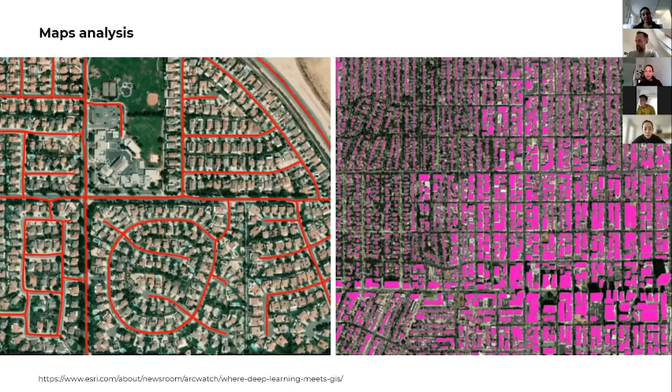The first one is classification. For example, we can use it for map analysis, to classify where the roads are, where the buildings are, to use this information further for our research. It's really useful when we get satellite photos to recognize all these objects without doing it manually.

Another way is to find some features. For example, we can use Google Street View to walk on the streets and recognize specific features of buildings and connect them with, for example, the construction date. Here is the map with the age of the building. I'm not really sure it's made with neural networks, because I think we can get some information like from GIS.

But we can also add this information, for example, like these maps of green canopy in the cities. This project is about comparing some cities because we have these maps with the green canopies pointed on the map.

It was made using Google Street View, so we can walk there to recognize how much greenery we have. It's really important that we can make it from human perception, not from the map looking down, but from walking. Because when we talk about comfort in the city, it's important to think about the people living there and analyze the city from their perspective.

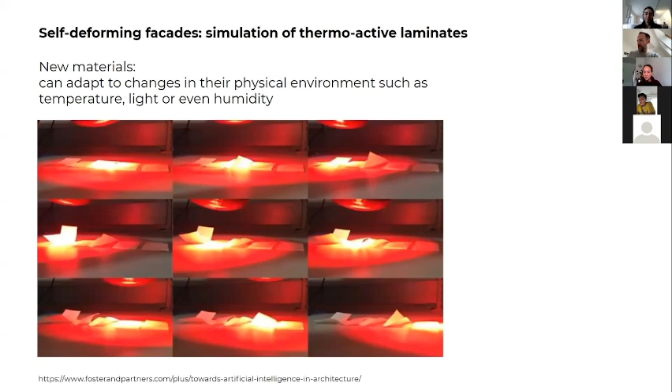Another way to use neural nets is prediction. For example, now we have new materials that are thermoactive and can change their form, but it's really difficult to predict the behavior of these materials. That's why we can train our neural network to make this prediction.

For the input, we need some examples, like the experiments. So we can put different patterns and watch the results, and then the neural network learns to predict. Next time we can just give it the result we want to achieve, and it will tell us what cutout pattern we need to get that form. For example, for difficult facades, we can use it to get the form we want.

And the second field, generation — here we can see the process of training the neural network. The first thing it produces doesn't really look like a plan, but then it's possible to teach it to provide us with good plans for our buildings.

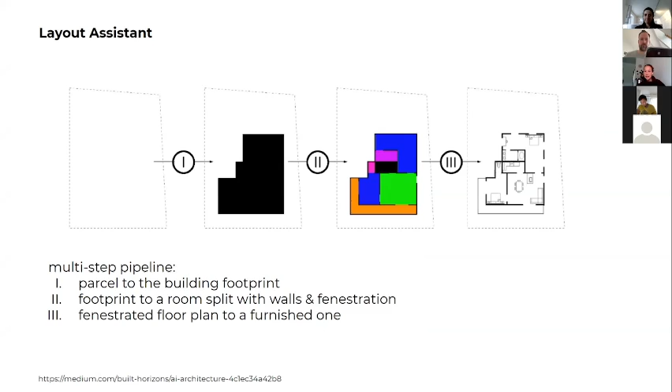There are also some steps: we can input the parcel of our site and get some contour for our building, then a sketch of the plan, and then a more detailed plan with the furniture.

It's also possible to make some specific cases, like when you already know some location of the room and you want to save it, you can put this information into a net. So, for example, the bedroom - she will be on this place, and others will be random.

Or when we already have some net with the construction, we can also put it into the neural network, and she will consider this information. It's also possible to generate facades. Actually, they don't really look good, but I think it's another possibility to use networks for architecture.

Yes, and then another part. Okay, yes, my part. I'll share my screen, so maybe you can close your screen. Yeah, okay.

My part is about, first I will introduce some interdisciplinary transformation and combination. First, we see some pictures of landmarks in... can you do full screen, please?

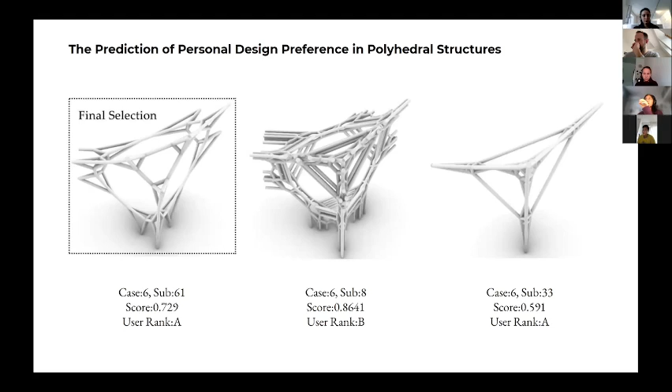Another is behavior analysis. The machine learning can capture the behavior happening in a space and collect it, then help the architect improve the quality of the space and make the space easier to use. I think that is quite useful.

Another thing I want to mention, and it's quite important I think, is building safety first. You can see some cameras surrounding the job site, and if the designer inputs some pictures of accidents that happened before...

the computer will analyze and figure out some similarities, and when the cameras around the job site take some pictures, it will analyze in real time some safety risks on the job site, and it will ensure the worker's life safety. I think this is quite important.

Another is lace wall. I like this project, and I think it's quite interesting. You can see there are some small modules - they are quite interdependent.

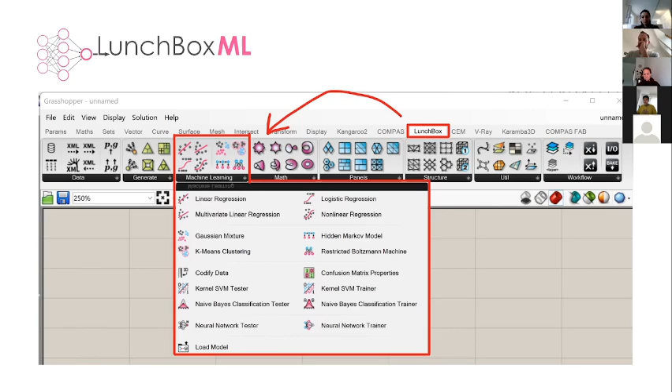The next one, Ant, is the one that uses a different library, so to say. It has the dependency of a so-called scikit-learn library. It has the possibility to get input from different data types like CSV, like digital data sets, also Excel form as input. And then it has more like... it also has supervised and unsupervised possibilities.

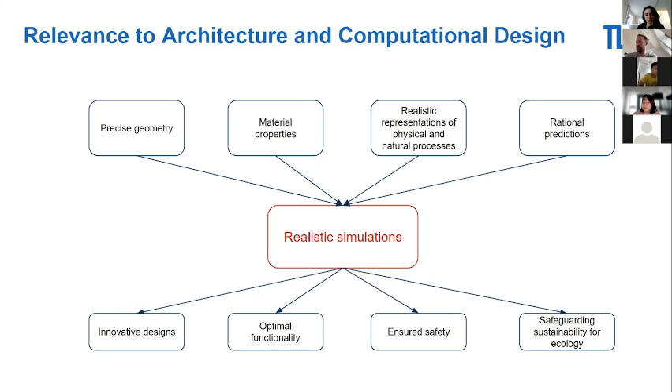We will show you some examples in the following slides. This simulation is always used as a method to solve industry challenges because of changes during construction, which cause cost overruns or delays for the project. If we want to achieve a balance between cost, time, and quality, we could use these simulations as a tool.

We could also achieve the balance between profitable, sustainable, and safe. This picture shows a construction project based on structural simulation. Now we will tell you more details about each subtopic.

Should I go and share my screen, or would you go on, Madeline? Thanks — maybe I'll just tell you when you can.

I'm going to present some basic information about physical simulations and give you some examples. In principle, it's a numerical optimization method to optimize a design, especially regarding physical influences and externalities such as wind, rain, heat, or the shading function of surrounding materials like buildings or trees. This is done in order to measure, for example, the thermal performance, to guarantee thermal comfort and a well-functioning building envelope.

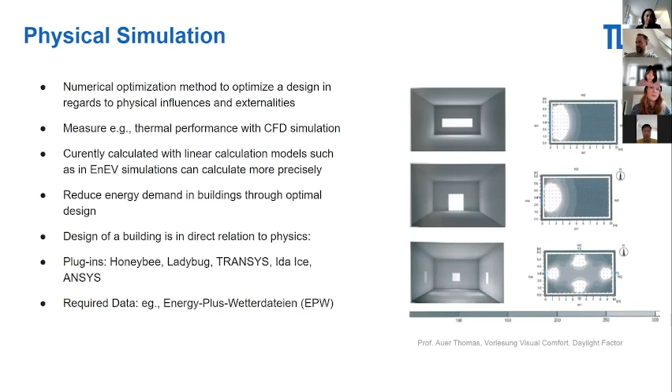Required data are usually climate data. On the next slide you can see an example of how daylight use was optimized in the Sächsische Aufbaubank Leipzig, a collaboration of ACME architects and Transsolar, which has this courtyard-like forest, you could say.

They have 251 beams creating a forest made out of beams. The idea of Transsolar was to see how much daylight they could get into the rooms and how many beams were needed, or what was too many. So they ran simulations with a baseline scenario with a lot of beams, then reduced the beams, and also created some atriums, where not everything was covered with those tree-like beams but holes were cut in it. Then they analyzed the outcome.

For that they used the plugin Honeybee, but other possible software for daylight analysis include IES or Relux, and also several programs like Revit can already do daylight analysis.

Next is the Harvard Science Center and Engineering Complex, also done in collaboration with Transsolar. Here they developed a parametric facade to find the best amount of covered window area to guarantee sufficient daylight inside, while avoiding overheating and reducing energy demand by ensuring optimal thermal comfort. They used an external shading device with different types of openings and angles, so sunlight is reflected inside or reflected back outside.

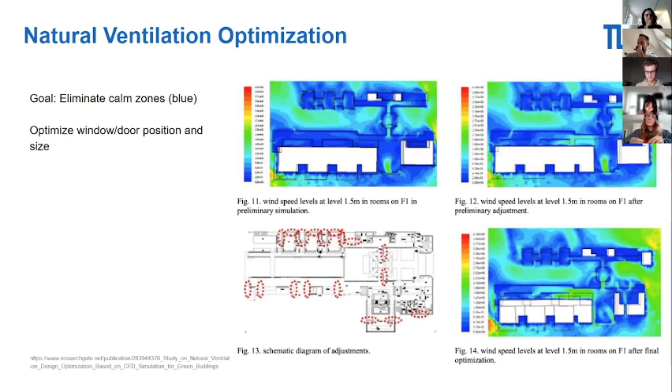In this example, they tried to eliminate calm zones between buildings to utilize natural ventilation, and simulated the airflow as shown in the pictures on the right. The red dotted lines mark the places that were changed during optimization — they changed the position and sizes of different windows and doors. The goal was to reduce these blue areas between the buildings, and on the bottom right you can see very little of these calm zones remain as a result of the optimization.

But I just wanted to highlight again that the design of a building is in direct relation to physical influences — it really defines how the building is shaped, for example its geometry. And then I'll hand over to Adrian, who will explain the next part.

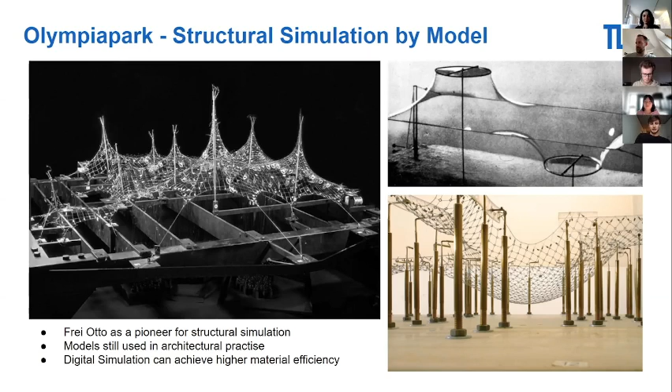Now obviously computer programs can easily handle those formulas at fast speed and in high amounts.

Once geometries become very complex, like engines or other components of technical products, there is one very useful method to calculate all this. It's called the finite element method, and it basically breaks down those complex geometries into small, easy to handle shapes or geometries.

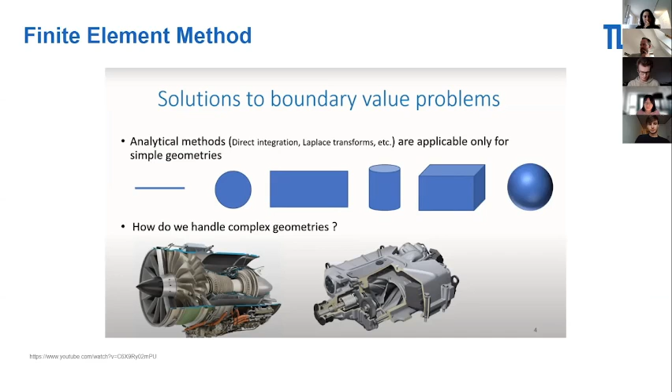Once the calculation is done for those, they are put back together, and the forces which are transferred from one element to another are calculated through the whole component via the nodes between those elements. With that, you can do a structural simulation of almost any complex or less complex component.

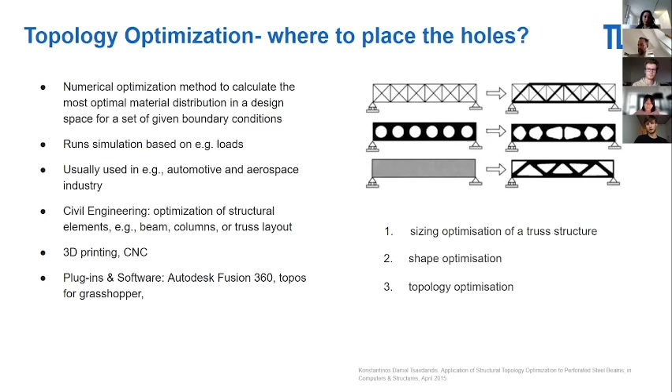And the other one is shape optimization, like the middle example, where you optimize within an already predefined shape or component how to distribute the material within it.

So it's basically an ergonomic form for sitting, but it's just a massive block, and they wanted to reduce the material use as much as possible for this chair. For this they used the finite element software to further reduce the material necessary to transfer the forces from the human to the floor, but still keep this ergonomic shape of the chair.

In a lot of steps, it is calculated down, and the material is reduced further and further at spots or areas where it's not stressed a lot.

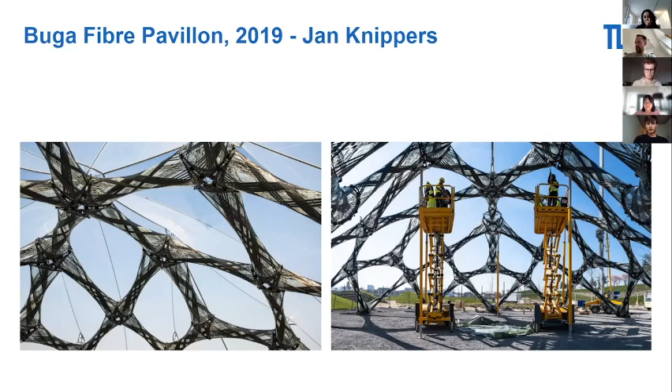On the next slide, you can see another example - a very experimental pavilion, I'd say, made out of carbon fiber. For this, they first used the finite element method to calculate the single components, and then they came up with a very innovative construction method.

As you could also see with the chair, it can only be made with 3D printing. It's not like simple wood connections or whatever - it's a very complex shape that comes out of those processes, so you need to come up with new manufacturing methods.

In this case, it was a kind of weaving or wickeln - I don't know the English term - of carbon fiber strings around a predefined shape. Out of the finite element method, they could know where they needed more carbon fiber and where they could reduce the amount of carbon fiber. So those are the models.

Next, we will show you another example based on a plugin named Karamba3D for construction design. In this project, instead of a normal column raster system, they put all this as input - you can see these black lines as parametric input - and this plugin will calculate it automatically to optimize this topology.

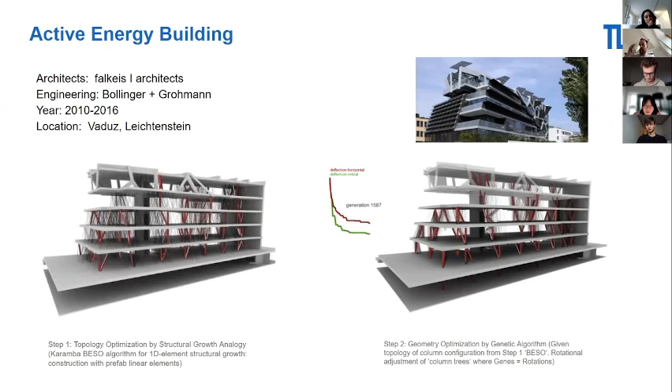In the second step, it will choose the best geometry for this construction, which is enough for the whole building but uses the least material. Based on this result, the architecture office developed the optimized construction, using first this V-shape column, and then based on this, the other building components were also developed.

You can see with the colors - the color shows directly if the scale from the column is enough for this location. Also, you can see for almost each location the force directions and which direction the columns should be.

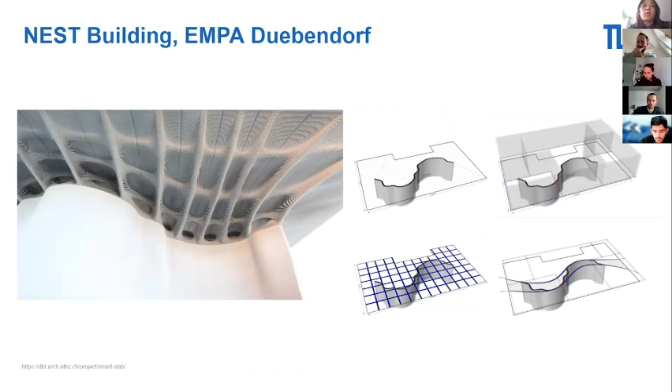This example, named NEST building, we focus on its roof, called the smart slab. From the picture on the right side, we can see the overall computational design process uses the structural grid as a starting point to generate a basic mesh geometry. After several iterations of selective subdivision sequences and parametric smoothing, the final surface is defined with around 30 million mesh faces, and the overall geometry is structurally optimized for its load case. The material is distributed in a hierarchical grid of curved ribs, so the overall slab has a weight reduction of nearly 70% compared to a conventional concrete slab.

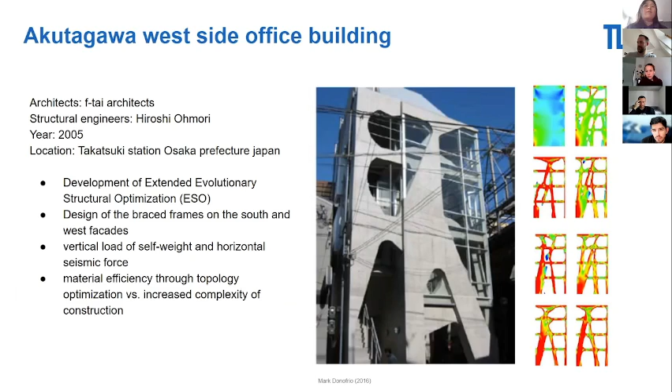Even though material efficiency is achieved through the use of topology optimization, the complexity of the overall construction also increased. So it is reasonable to assume this would have been a limiting factor on a larger scale building, but with the development of 3D printing technology, we can solve this kind of problem.

So we can say the main function of this kind of plugin is structural analysis and optimization, which can perform rapid linear and elastic analysis of frame and shell structures.

In the next slide we also introduce other plugins, because we think Rhino and Grasshopper are still the main tool and method for structure simulation and topology optimization. The picture on the right side shows the related plugins.

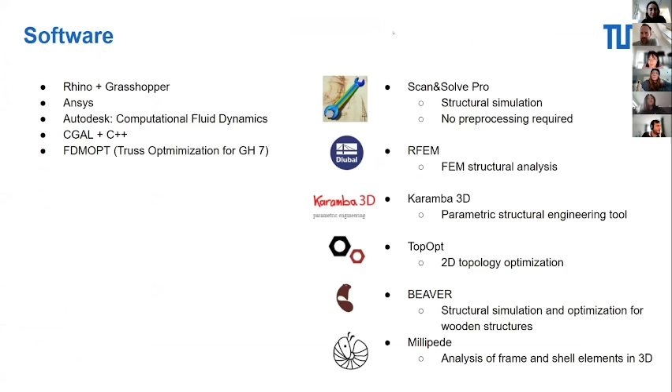Have you tested them? I have used Karamba 3D before. Okay, yeah, and it's actually very simple.

You need to input your demand on construction and what kind of parameter elements you want to use, and it will calculate automatically and show you with color if this scale is enough and which point must be stronger. And actually, we have also found a video from this website. It shows better how it works.

Moment. Okay, may I show my screen again? Yeah, like here.

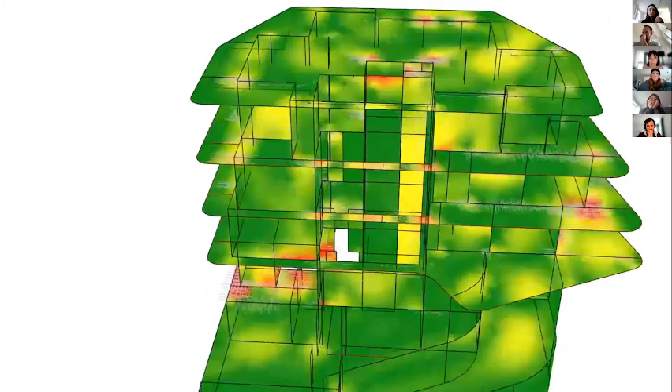So I would suggest that you really test some of them. When you show them, it would be cool if there are examples, and if they are free or there is a demo version, you should really test them to see what's going on.

I also have a question. Do you know how much background information you need about physics? Because we just saw the finished product, and if I remember correctly from my first term static lessons, you have different snow loads between winter and summer. So how do you know which snow load you actually need in your specific region? Do you need the background information for that?

Or is there some way in these plugins, with the EPW file, that it's automatically inputted from your location? You should say, I am here in Munich, for example, and then they will automatically say that you need these snow loads.

I know all that climate data is very precise, from day to hour to minute. So you can select the degree of information that you want to include, and then automatically it would calculate required snow loads based on the climate data. It depends on what kind of simulations you are doing.

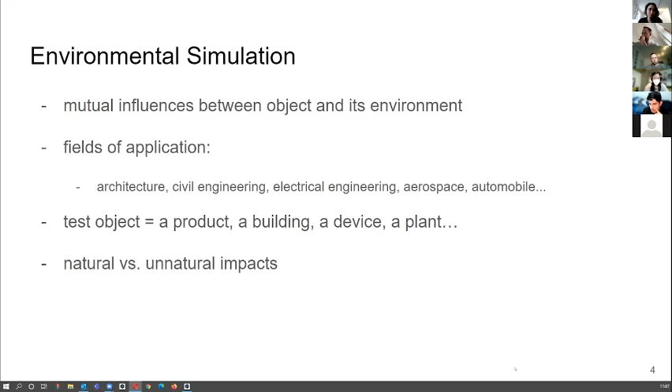Generally speaking, there are four steps of environmental simulation. Firstly, the real world environment will be analyzed and the influence will be calculated. After that, it's the simulation. Then the environmental impacts onto the test object will be evaluated. And finally, it is examined if there are possible repercussions, meaning the impact from the test object backwards onto the environment.

It's a bit like the grasshopper example we did last week. We see the finished building has some impacts onto its environment. But in practice, the environmental simulation doesn't only take place in computer programs like we know for the building sector. There is also a large variety of equipment in laboratories, which I will show some examples of later.

So the aims of this environmental simulation are to collect data about a product or building's performance, its operational behavior, but also its long-term behavior, and to estimate its lifespan. People want to collect this data as early as possible. It's also helpful for the design process.

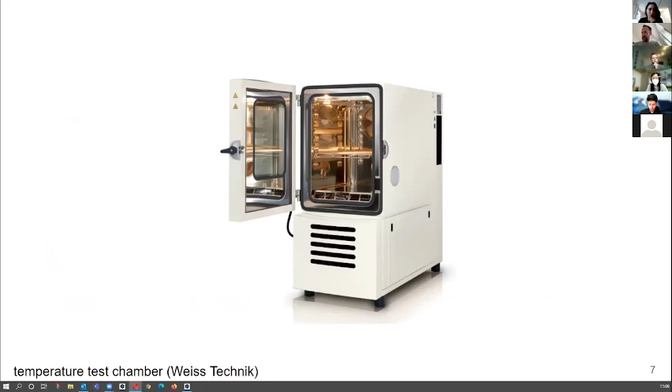This will be the example for the computer-aided simulation, which will be explained with more detail in following pages. And this one is a so-called temperature chamber. The test object will be put into this temperature chamber to see its behavior and performance. This temperature chamber can simulate different temperatures according to climate zones or seasons, and so on.

So basically, we found out that there are many so-called chambers to simulate different environmental impacts, for example temperature, humidity, altitude, solar radiation, and also over and under pressure, explosive and corrosive atmosphere, and so on. Basically, the product will be tested in a simulated environment with the so-called worst case, to prove that they are robust and durable enough for real-world use.

To sum up, there are several advantages of environmental simulation. For example, it helps designers and product developers make decisions in a very early stage of design or development. One example will be, as we know, climate responsive architecture. It can also detect problems before real-life application to ensure safety and product quality, which might be difficult for buildings because we cannot test the building after it's built and rebuild it or something like this.

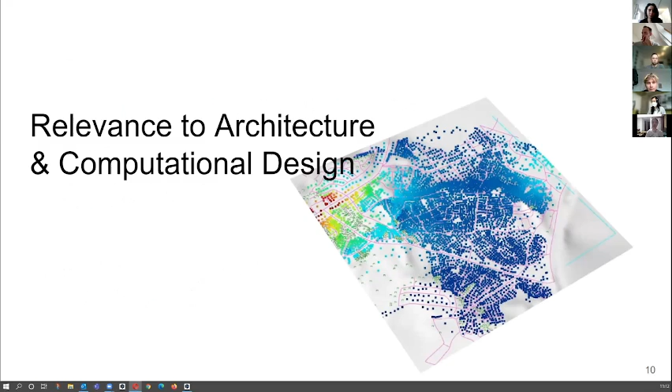So what are the tools for planners which can be used in these early stages of design?

For an environmental design approach, the initial step is to identify critical environmental factors that influence the building design. Environmental data sets need to be visualized to assist designers in their decision findings and to enable the designer to communicate them. Advanced studies are to be integrated within the building geometry, allowing the planner to explore the direct relationship between environmental data and the design.

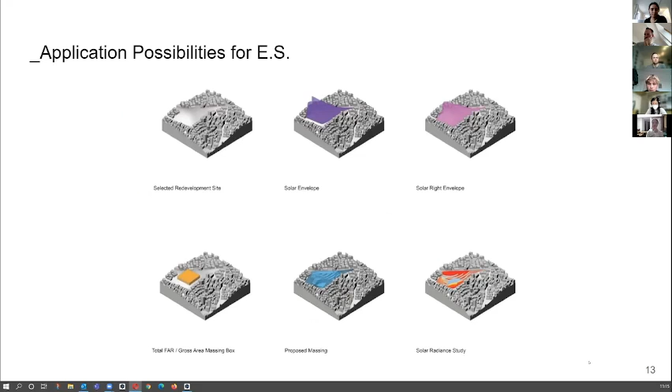In the Rhino Grasshopper environment, we have several tools to use for environmental studies. The advantage of Grasshopper and Rhino is that you use one model for design and for analyzing simulations. When the base geometry is adapted through some simulations, the design model automatically updates, and it can also be linked with building information modeling, so it can be integrated into the common workflows of architecture offices.

Here you can see some of the plugins for Rhino, like Ladybug for climate visualization and analysis, Honeybee for building energy and daylight simulations, Butterfly for airflow modeling, Dragonfly for urban modeling, and Spider for web simulation. In the following, we will explain three of them in more detail.

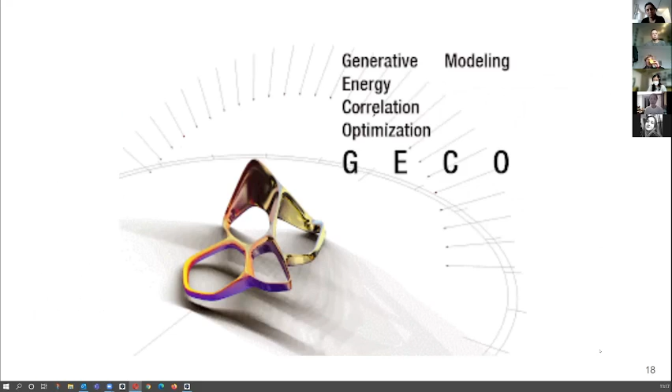First of all, I would like to explain the GECO plugin, which was created by Ursula Frick and Thomas Grabner. Basically, if we look at the meaning of GECO, we can do generative modeling, energy analysis, correlation, and optimization.

GECO is a set of components which establish a live link between Rhino Grasshopper and Autodesk Ecotect to export, evaluate, and import data. GECO allows export and actively cooperates efficiently with another software called Ecotect in order to evaluate one design with various performance data. GECO also makes it possible to import the result as feedback back into Grasshopper, and this feature provides more ease to users.

Ecotect is a visual software for architects which enables them to test environmental performance issues and simulate various environmental and climate conditions in order to design more green and efficient parametric structures.

GECO is designed for the early stage of conceptual design and encourages the player to understand environmental factors and interactions.

Why is it useful? Ecotect accesses the performance data to import the result as feedback to Grasshopper. This could be done as a single process or looped to improve performance and the design of the building in the context of its environment. The single result of the process could be saving the Rhino vertices of the analysis mesh to store data for later use inside a different design approach.

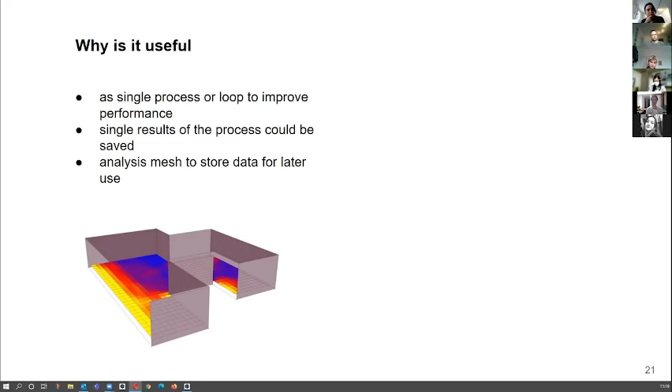And the second plugin I will introduce, guys, is the Ladybug.

After you download the EPW weather file from the website, you can use Grasshopper with the Ladybug plugin to do some environmental analysis about sun paths, sun radiation, wind, or something like this before your project.

First, I will give you an example of the sun path analysis to show how it works.

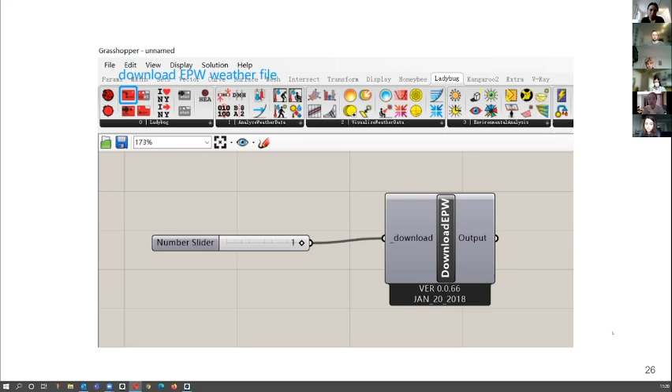First, you can use the item to download the EPW weather file that you want. You can get a map and find the weather data wherever you want, mostly anywhere in the world, and download the file.

After you download the file, you can use the import EPW file item, and use the file path to link to the file you've downloaded. Once connected, you can see things like wind speed, wind direction, location, or other data related to the file you've downloaded.

Then you can find the sun path simulation item here. You connect the location to the location you've chosen, and you'll see an analysis period, which means you can input the period of time you want to analyze.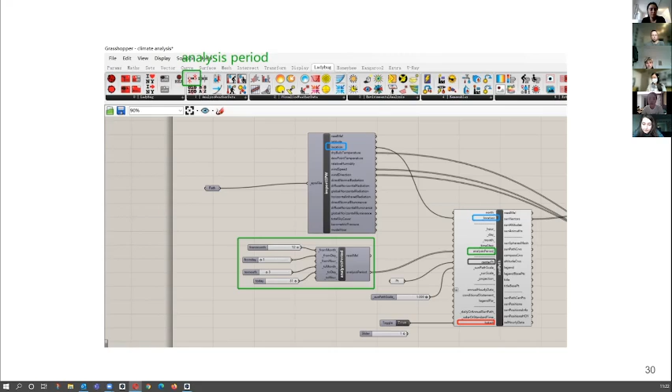You can analyze the sun path between, say, January and March or something like this, and use a toggle to run it. Then you get a sun path pattern like this. I used this site for my last project to show the result.

We can also use it for windroses. You can find the windrose component here, and link the wind direction and wind speed to it. Using the same period of time linked to the analysis period, you get the windrose result for the same site.

Besides these two functions, you can also analyze solar radiation, radiation rose, or view analysis for your site. These are commonly used for analysis before your project, or for situations where you already have some plans and want to find which one is better, more environmentally friendly, and choose the better one.

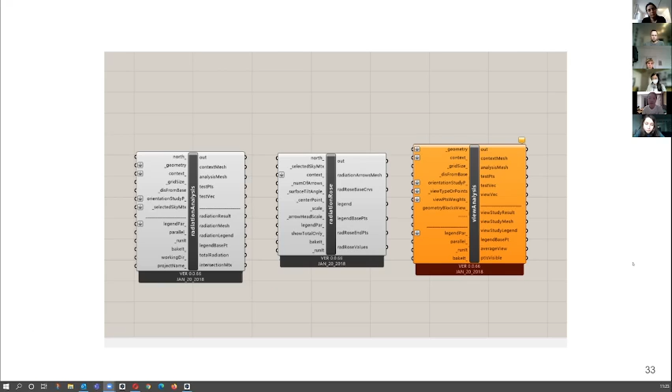But the limit of it, I suppose, is up to the calculation. You have to control the shape of the building yourself, because if you directly use the result of the calculation, the shape of the building might be a little bit weird.

I'm going to present the plugin Honeybee, which is, I think, one of the most popular plugins for environmental simulations.

How does it work in general? Rhino and Grasshopper deliver the geometry, so as the 3D model, and environmental data, like for instance the EPW file for the weather, and certain other parameters needed for the simulation.

The Honeybee components, depending on the use case, use external simulation engines such as Energy Plus for energy modeling, or Radiance for daylight studies. The components then provide results which can be visualized, most likely by Ladybug components. So you would use them together in most cases.

Why is it so powerful? I think one reason is the huge variety of functions. We have overlaps with the physical simulation part from the group before, but we can take a deeper look into a few functions.

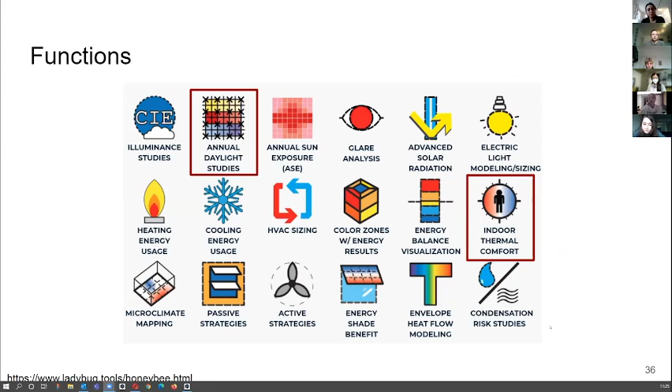I have two examples, one for annual daylight studies and one for thermal comfort in the Grasshopper environment. They are both taken from the Ladybug website, where you can download Grasshopper files for each function and modify or explore them. It's really good for learning Honeybee, I think.

In this case, we have a daylight simulation where annual results are created. First, you put together a so-called recipe, which collects the EPW weather file and the area you want to investigate as test points. This recipe then goes into the component where the actual analysis runs.

This component also collects the built environment around the area as Honeybee objects. Then you add some more parameters going into this component, and this generates the measurements you want to show, such as daylight autonomy or useful daylight illuminance. These results can then be visualized or analyzed.

The second example is for thermal comfort studies. In this case, you get the results to calculate the predicted mean vote. In this main component in the middle, you have the input for the EPW weather file and the zone you want to analyze as the honeybee zone, plus some more parameters such as the information on which output you want to get out of the simulation. At the end, you get the operative temperature, the air temperature, the mean radiant temperature, and the relative humidity, and then you can calculate the PMV out of it.

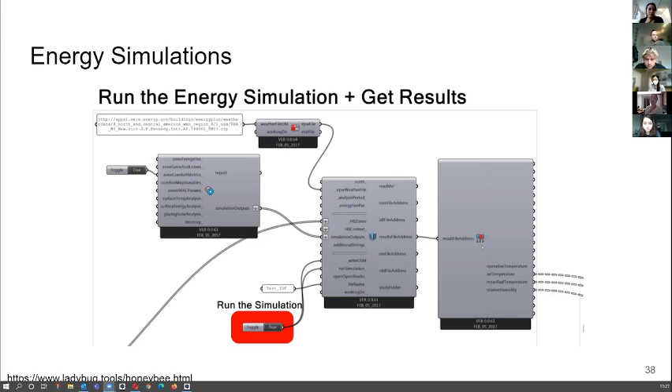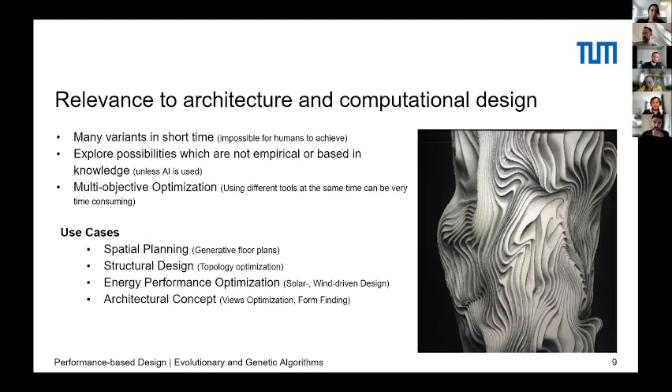The following slide shows us an optimization process, how an optimization process tries to minimize the torsion moments in the represented structure. Using Grasshopper, Karamba, and Galapagos, the best outcome can be searched, as we can see in this animation.

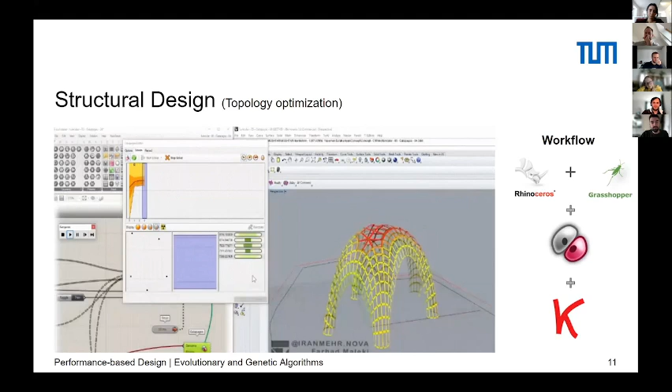The next example shows also a similar workflow. In this case, the location of different towers is tested, taking several aspects into consideration.

Firstly, the location of the towers in the plot is given by a set of rules which can be based on optimal distances to the neighbors, to themselves, and the shading produced by each tower. Afterwards, the views are optimized so that the final product does not have towers facing each other directly without privacy. In this case, there are several optimization processes built as a cascade, one after the other.

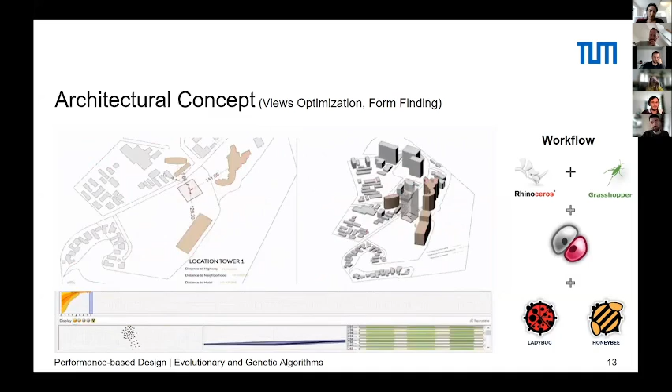Now in the next slides, we will take a look at how three of the most used plugins, Galapagos, Octopus, and Biomorpher, work. Alexandro will start with Galapagos. Okay, so we will now jump into the first plugin using genetic algorithms, which is called, as Andres said, Galapagos.

What we will look at is, first of all, the general definition of the plugin, and then we will explore the inputs and lastly the outputs which can be generated.

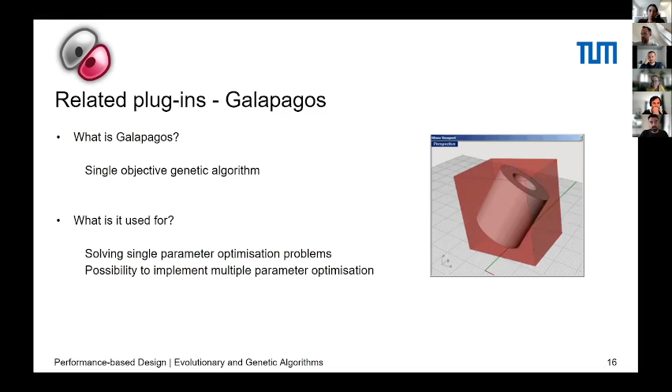So Galapagos is a single objective genetic algorithm, which means it can be used for solving single parameter optimization problems. In simple words, this means that the plugin analyzes one parameter, for example, the length of a path, and optimizes it. Despite the fact that it is a single parameter plugin, it is possible to implement multiple parameters by creating functions, but we will see in detail how this works in the upcoming slides.

So when we place Galapagos in the Grasshopper interface, we get the possibility to use two inputs, the genome and the fitness. We will start by looking at the fitness, which will help us to understand also the role of the genome. As we saw in the introduction, genetic algorithms are essentially derived from the biological process of evolution by natural selection.

In fact, in natural evolution, fitness is a very complex concept, and it's not always about the best, strongest, or highest characteristic. In contrast, in evolutionary computing, we can make the fitness be whatever we want. In the case of Galapagos, we need a single number as an input for fitness. What the plugin will then do is maximize or minimize that number.

But we can ask ourselves, what is a number in this case? It's a characteristic, as we said before, for example, the length of a path, which we want in this case to be as low as possible. And as we have seen in the beginning, it is possible to analyze more than one characteristic, and so feed Galapagos with a fitness function instead of a single number.

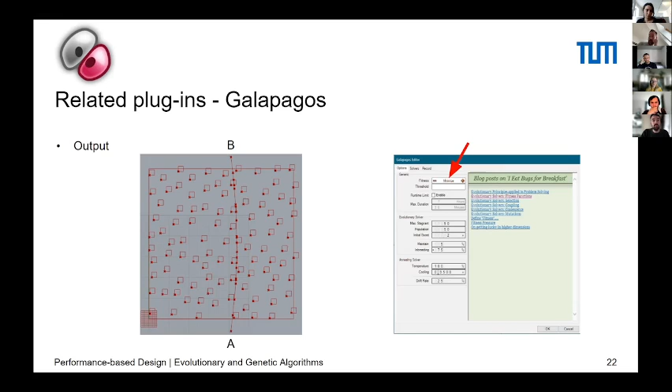So to look at the output of Galapagos, we will have a look at a very simple example. In this algorithm, we want to find a path from point A to point B without touching the small rectangles, and the path needs to be as short as possible. To do so, we want to minimize our fitness.

And so after having seen the first genetic plugin, we will look at a few more, as well as their advantages and disadvantages in comparison with Galapagos.

So let's start with Octopus. Octopus is a multi-objective genetic optimizer, and it was first introduced in 2012 with its latest update in 2018.

Because the insulation thickness corresponds directly to the insulation cost, our overall goal here is just to minimize the cost.

But in some cases, the different objectives are in different search spaces. For instance, as a student, you want to maximize your credits in each semester, but also minimize the difficulty. So to map both the ECTS gained and the difficulty of an exam is really difficult.

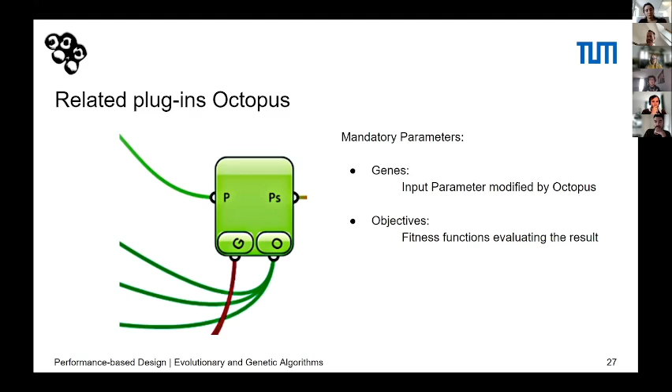The genes are like the input parameters, as earlier the genomes. The objective functions - we need at least 2, since there are multiple objective functions. Also, you need to consider that Octopus always tries to minimize the result, so if you have a maximizing function, you have to multiply it by -1, as earlier in the prisoner's dilemma example.

We also have optional parameters. Those are outputs, also called phenotypes. They're just some results used to show, first of all, the search space - that's the P side, a mesh, just to see how things differ and change over time.

Also, we have the PS output - that's actually a tree. Every time after each generation, it produces some sort of output since you can use it for further calculation to visualize how things change in terms of objective, but not the search space itself, which helps for further first calculations but doesn't provide too many further details.

So what are the advantages of Octopus and the disadvantages? On the next slide - first of all, the advantages. Octopus is all about flexibility.

Also, one disadvantage is gradient-free optimization, on the next slide. So what's gradient-free? First I need to explain what's gradient-based. That's something usually used in deep learning, where we try to create a continuous function, map all the points on this function, and use the slope of this function to get to our optimum. For instance, if it's more flat, we know we can make bigger steps, and if it's too steep, we have to use smaller steps in order to reach an optimum.

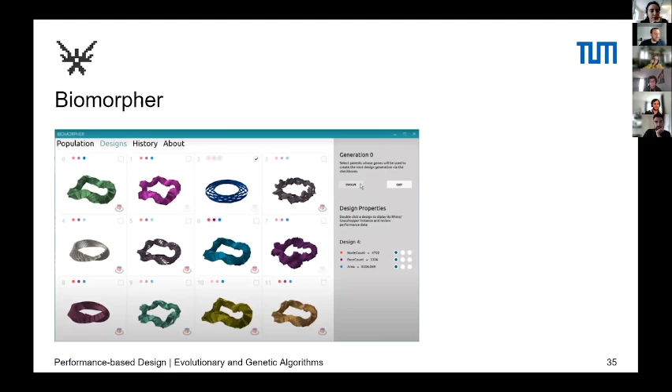Next slide, please. So here, for example, we selected the second group, number 2, and then we clicked evolve. You can also filter where it says Design 4, or filter based on the fitness parameters or performance parameters you input in the node, to decide which ones are more fit, not only based on what you see, but also based on the parameters. So basically you click the group and then click evolve, and here you can see generation 1, while the other one was generation 0. As you can see, they are all pretty similar because they were based on one group, so of course it makes sense that they are very similar.

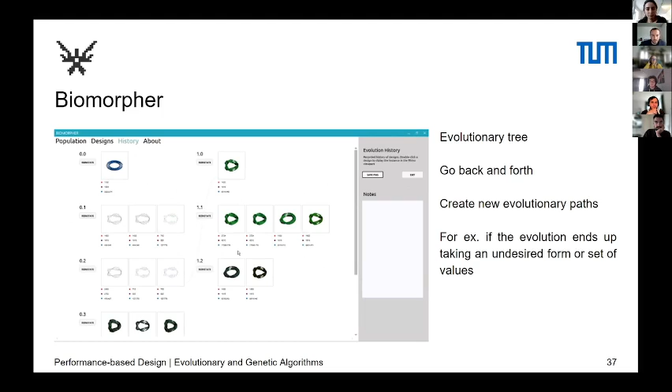Next slide, please. What you can also see in the interface of Biomorpher is the history, or the evolutionary tree, where you can go back and forth. For example, if you end up with a design you don't like, or with parameters that are too extreme, or you just change your opinion, you can go back in the tree, reinstate an older pool of genomes, and then start the process of generating again. Next slide, please.

And here we can see just a bigger tree.

I'm not going to talk in detail about the process, but basically what the user needs to do is the red part of the process. The only thing needed is to decide if the final design was found, then you enter, and if not, you can reinstate an older population in the design tree, or manually select the ones you want and continue with the evolution, with the iteration. The rest is Biomorpher.

Here's just a quick example of all the nodes you get with Biomorpher. You can store the information you got after all the generations in those nodes that internalize data, like the ID nodes and the 0.1 nodes. That's very useful if you're in a big project with a lot of data, you don't want to lose that data. It took a lot of time to produce it, so this is very useful.

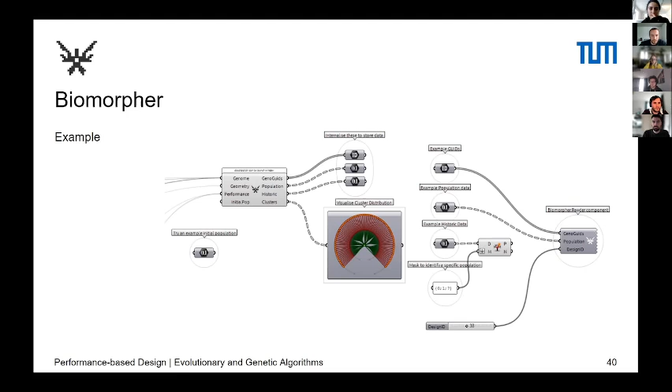And then here's just a quick sum up. We talked about Galapagos, Octopus, and Biomorpher, but there are also other evolutionary plugins, for example Wallacei, Opossum, and Aereo. The other ones are not so great, I think, but maybe they are still worth it. Wallacei, of course, is a really nice plugin.

Yeah, cool. Very interesting.

What you also showed, just to sum it up a bit, these genetic algorithms always make sense the moment there is not just one optimal solution, when there is a solution space we are in and where we need to have one or several parameters that need to be weighed, measured next to each other somehow. And there it makes absolutely sense to do it that way.

One example, I don't know if it happened like that, but it could, is this bird nest in Beijing, where there is a clear structure with beams that hold the whole nest. Then you do this algorithm where you say the holes shouldn't be too small because then you can't fix it, and shouldn't be too big because then you cannot wrap over the plastic thing. So there it makes absolutely sense to do something like this.

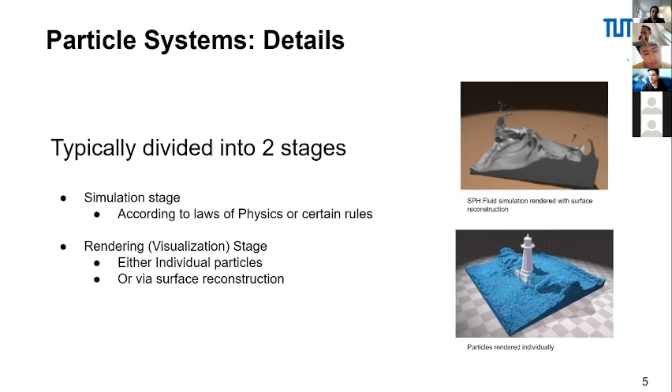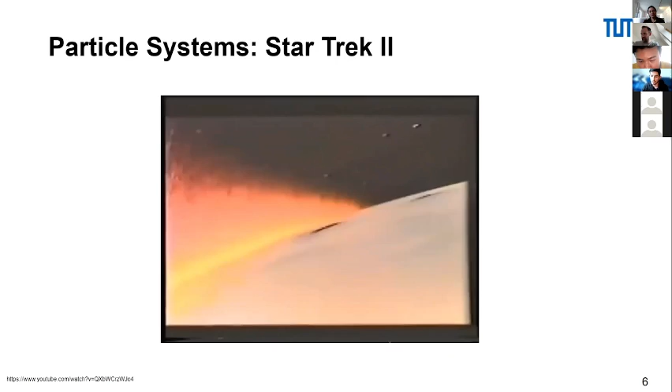We also brought up this part from the movie Star Trek, because around 1982, the producers of this film tried to recreate this simulation, this visualization of what you're seeing right now. This is a fuzzy visualization trying to take over the planet. That was the first time the term particle systems was coined.

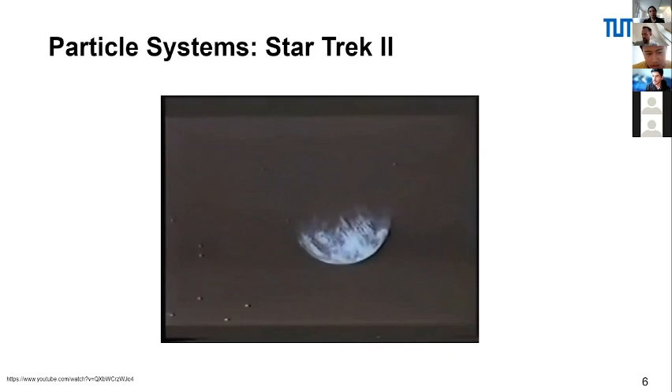Since then, in the early 80s, particle systems have been used in countless video games, animation, digital art pieces, and installations, to try to recreate natural phenomena that are difficult to represent, such as fire, smoke, waterfall, fog, grass, bubbles, and so on. It becomes a useful technique in computer graphics, and now we'll talk about applications for it.

Usually the application is to do visualization of systems. From one side, we can talk about it as N-body simulations. N-body simulations are when one particle affects another particle. They're mainly used to simulate galaxies and the universe. But what gets complicated is that they are computationally expensive and use large resources, because when we talk about the universe, it's not one or two particles, but billions, trillions of particles that affect each other, so it turns dense in terms of resources.

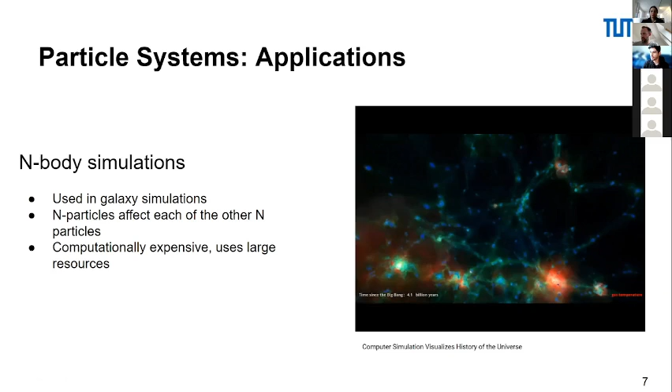Here at the right side, we can see the visualization of the history of the universe, how it evolves, and what are the uses for it, to recreate things.

Another application is mass spring systems. Usually with mass spring systems, the particles are connected with springs and influenced by some forces. That's how we see it in this example on the video, usually used to recreate cloth simulation, and it's based on Hooke's law.

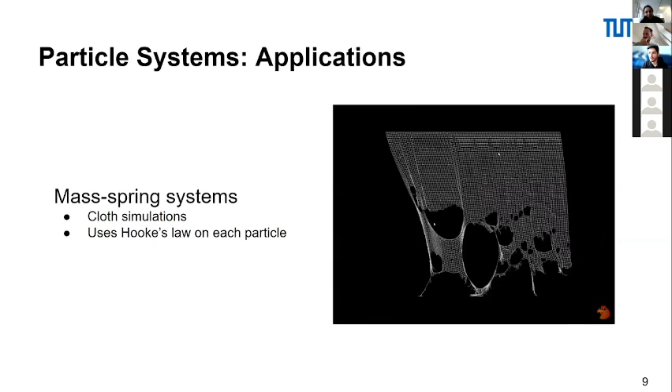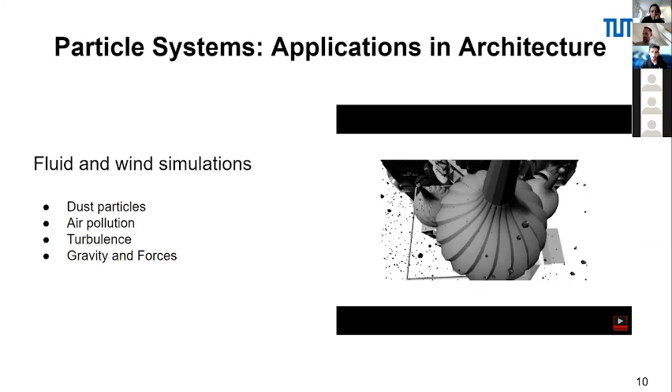In detail, we can also visualize dust, air pollution, turbulence, gravity and forces, and also, for example, thermal comfort visualizations. We can also do more specific visualizations related to population, buildings, trees, and the particles themselves become agents for a multi-agent system, which we'll talk about later. Here we can see how this might happen: particles become persons, and then they move. We give them some parameters so they move along it.

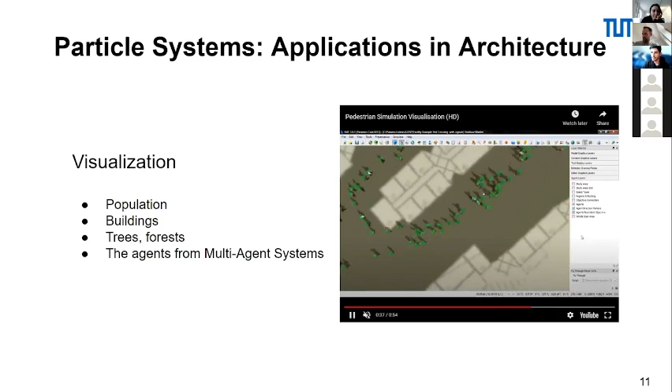So the point is that particle systems do the visualization part, but then more things come with it than just particle systems.

And we figure out that when we combine a particle system with springs, we have these particle spring systems where, as I said before, the particles are united through springs. So at the end, we can use them as a way to do form finding within structures.

So now we're gonna jump into the plugins. We're gonna show you these 3 plugins, and I will give the word to Yunus. So for the plugins regarding particle systems, we'll be considering 3 of them: first is FlexHopper, and then Stellar 3D and Kangaroo.

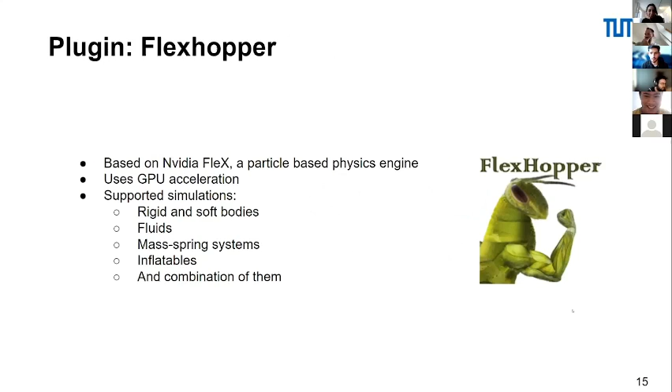Starting with FlexHopper. This plugin is based on NVIDIA Flex, which is a particle-based simulation engine for physics, and it uses GPU with CUDA, so it's a parallel solver. In that sense, it performs more efficiently in complex scenarios. Some of the basic simulations in conjunction with particles are rigid and soft bodies, fluid simulations, mass spring systems, inflatables, or a combination of these.

So the main components that constitute FlexHopper are, firstly, the Flex Engine component, which is the core of the plugin, combining the scene information, the parameters, and other simulation-specific parameters into the core of the algorithm. And the second most important component is the scene component, which...

...specifies the type of simulation we're doing. It could be a particle-based simulation, which most of the time we're doing, but it could also be rigid bodies, or we can combine different types of components into this scene component. And of course, to specify different types of parameters, we have a specific component called parameters, where we specify gravity, viscosity if doing fluid simulation, or wind and drag.

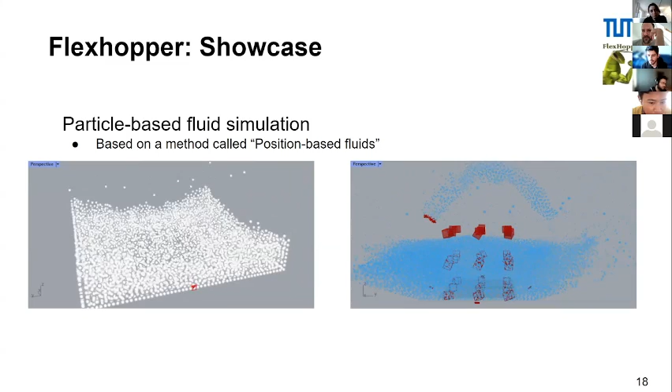So we can take a look at the next plugin, Stella3D. The FlexHopper plugin was mostly for physics simulations, but with Stella3D, it's not necessarily for physics simulations—it also encompasses multi-agent systems, and basically simulates the individual behavior of particles within the population.

In this plugin, each particle is actually called a stella, and has the name of the plugin. We can show some main components. The stella, as we mentioned, is the plugin's component, so we make stellas from the points, as in we are making particles from points.

We can specify the lifespan, of course, which is a native specification for particles. Then what we can do is enforce different types of simulations, different types of forces, like the arrival force or the seeking force, and these forces are what keeps a particle in a population coherent or maybe dispersed from the population, as we will see in the showcase. The first showcase is the seeking force component.

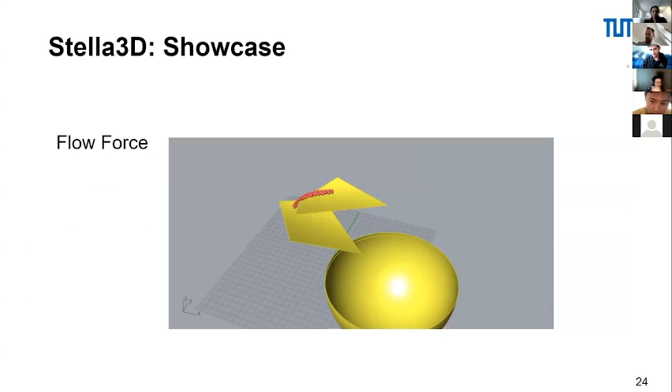As the final showcase, we have the flow force components. Here, what happens is we have gravity, and the flow force basically keeps the crowd intact, so it doesn't disperse. That way we can see a flocking sort of behavior.

For the third plugin, we have the Kangaroo plugin, which many of you may be familiar with because it comes built in with Rhino. This plugin is not necessarily for particles, but nevertheless it's useful for particle systems because it sort of subsumes the particle systems, and it's generally used for meshes.

For example, we can do particle simulations because in a way those generated meshes use particles, and this plugin is not necessarily for physics simulations, but general types of simulations and optimizations.

For that reason, we have a main component called the bouncy solver, a soft and hard solver component, which is the heart of the plugin. What we do is we generate different types of constraints and connect this to the goal object inputs of the solver components, and that way we can have more flexibility in terms of the type of simulations we are making.

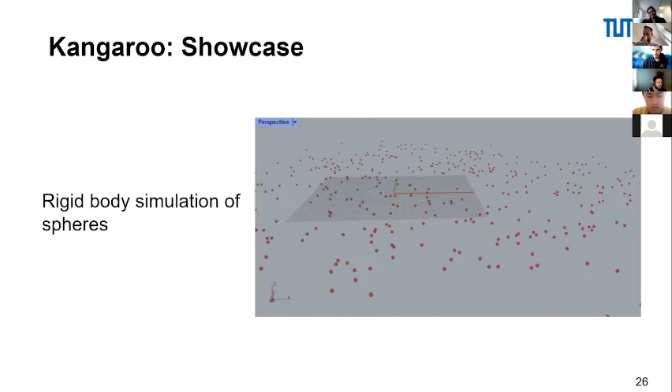As a showcase, we can generate a simple rigid body simulation made out of spheres. This is kind of like a particle-based behavior. Here, what we're doing is visualizing spheres as particles, but usually in real-world scenarios, doing this would be inefficient.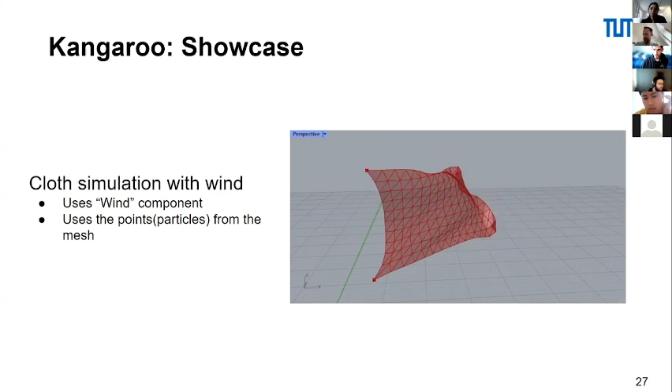For example, here we have a cloth simulation. What happens here is we basically have a mesh, and we use the built-in component called the wind component, and this component generates the cloth simulation. But underneath, actually what happens is this mesh is deconstructed into particles, and as Juan mentioned earlier, we are basically going from the particles to the upper hierarchy. So the mass-spring-based systems are acting on the particles themselves, not the actual entire mesh.

Finally, for the comparison of these different plugins, we can summarize: for particle support, we see the Flex software is already built in for particles. For Stella 3D, we have components called stars, which is basically particles. But Kangaroo is not necessarily specifically for particles, but it's still useful nonetheless.

The scope of these plugins: as we saw, Flex is used for particle-based physics simulations. For Stella 3D, we have particle behaviors and particle simulations again, but in the context of multi-agent systems, or intelligence systems. And for Kangaroo, the scope is much more general here.

We are solving general simulations, constraint solving, or optimizations. The main components are the Flex engine, which is a single component in the Flex ecosystem. In Stella 3D, we don't have a main component, so we build simulations using various components in the Stella 3D plugin, but there is no single component. In Kangaroo, since we're solving a given constraint optimization problem, we just have a single solver.

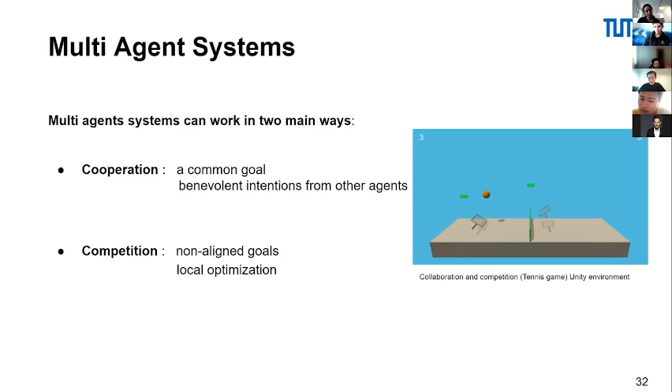Compared with the particle system with passive particles, the multi-agent system tends to use intelligent agents to calculate the result through communication. In short, in the multi-agent system, more effort is devoted to setting the agent's properties and defining the rules of negotiation between agents, and they can do far more than just a pure simulation.

In the field of computer science, multi-agent systems have many applications close to artificial intelligence. The most obvious is simulating swarm intelligence. But what is swarm intelligence? Swarm intelligence is the collective behavior of a decentralized and self-organized system, like a swarm of bees. In a swarm system, random interactions between agents lead to the emergence of intelligent global behavior, but this is unknown to the individual agents. An example is BOID, which simulates the flocking behavior of birds. The complexity of this system arises from the interaction of individual agents following a set of simple rules, such as separation, alignment, and cohesion.

There are also two applications in the field of machine learning: reinforcement learning and multi-agent learning.

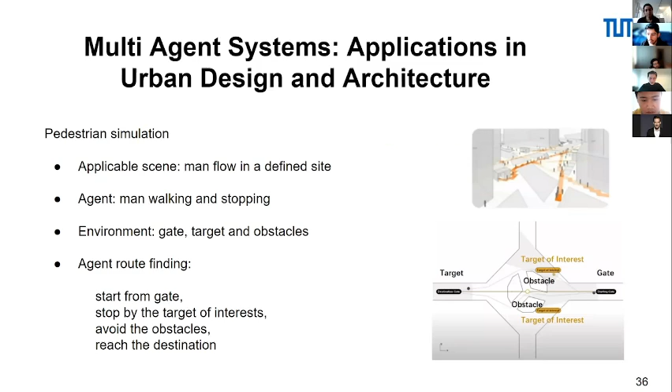The motion of the agent is based on the physical engine. The influence from the other components will be in the form of forces applied on them, so that the acceleration and the velocity can be calculated. There is also a repulsion to avoid collision, and the attractive force will create several stops for the agent, finally leading it to its destination.

The mechanism of the environment is to calculate the shortest route from the obstacle outline. That means the particles will move along the lines if they have not been influenced by the forces we mentioned. As you can see on the right side, it shows a simulation of customers entering a store.

Another example is Cloud Pergola, one of the pavilions at the 2018 Venice Biennale. Based on the multi-agent system, it mathematically captures the complexity of a cloud formation and calculates the dynamic mechanical relationship between these agents.

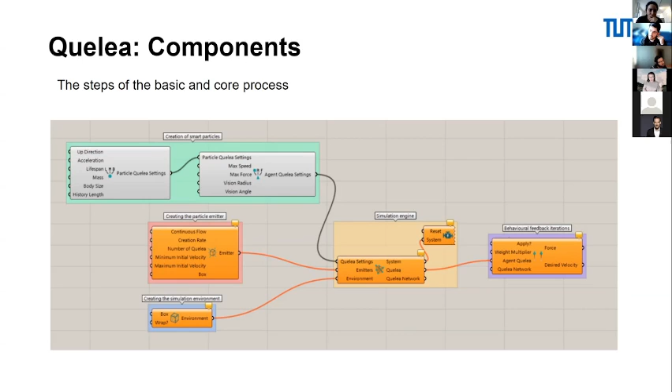The second plugin I found was Physarealm. This plugin is similar to the ant colony algorithm, which is a probabilistic algorithm used to find optimal paths. The Physarealm plugin simulates the way slime bacteria plan optimal paths. This is a design technique that can be applied to both large-scale urban planning and small-scale spatial floor optimization in buildings.

Again, I have marked the basic and core components in a red box. This is also the core building process steps for this plugin.

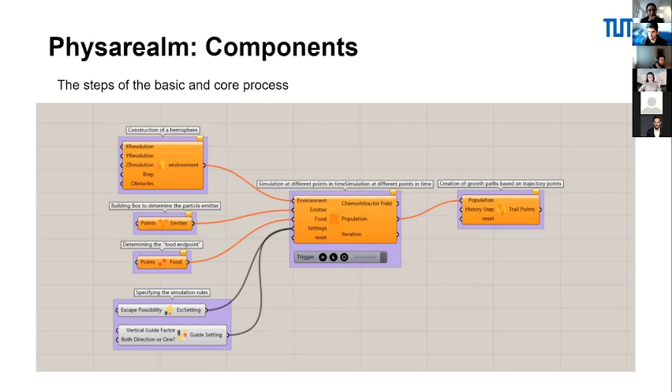The last plugin is Culebra. The application scenario is similar to the previously mentioned plugins, but this is a processing-based program. It also handles the data and visualization.

So this is a diagram of the dynamic simulation logic of this program plugin. The red part represents possible agent behaviors, such as cohesion, cooperation and alignment behaviors. The gray part is the object of the behavior. The green part is the setting control conditions, and the blue part is the output or geometry.

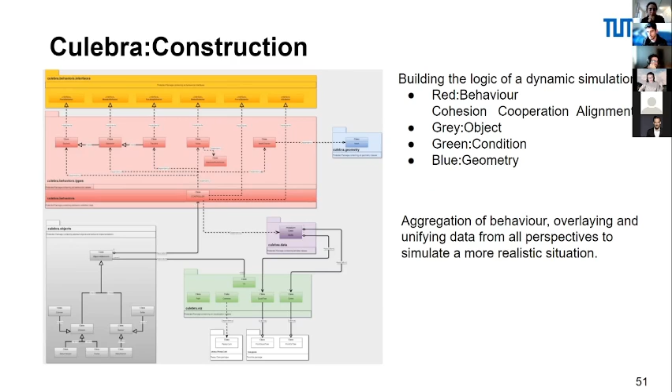Okay, next. So finally, I asked some of my friends who had used these plugins many times to rank them in terms of four aspects: ease of use, richness of application scenarios, and efficiency and visual performance.

Firstly, in terms of ease of use, Physarealm is the easiest to use, and it is relatively easy to get the result you want. Culebra is the most difficult to get started with, because it's based on processing for simulation, and it is less controllable, making it more difficult for people who don't have a basic understanding of processing.

Secondly, in terms of richness of application scenarios, Quelea can do different simulations, almost all particle-related simulations. However, Physarealm is more limited in terms of its functionality, as it can only simulate ant colony effects. Culebra, because it calls an existing package, requires programming. If you need to simulate more situations, you should write some processing yourself.

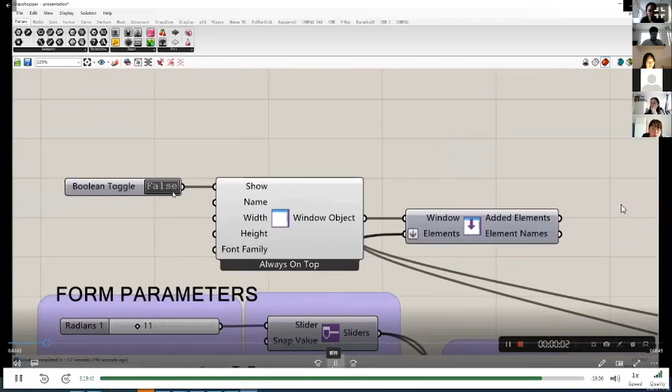You can first create a window connected to a boolean toggle, and change it to true. Here are some parameters you can change, for example the form parameters, floor numbers, and floor-to-floor height. You can see the 3D view changes at the same time. It's a bit slow.

And you can see that the charts will also be changed, so that is visualized for other people to see how the building looks like. And I think it's a very useful tool to communicate with other people.

But I think this plugin should be improved, because sometimes when you change the name of the number sliders, it won't be changed in the window at the same time. In this case, you must delete the slider and then create a new slider with the right name.

Next is another plugin, Human. Human can extend Grasshopper's ability to create and reference geometry, including light blocks and text objects. For example, you can see the random display mode.

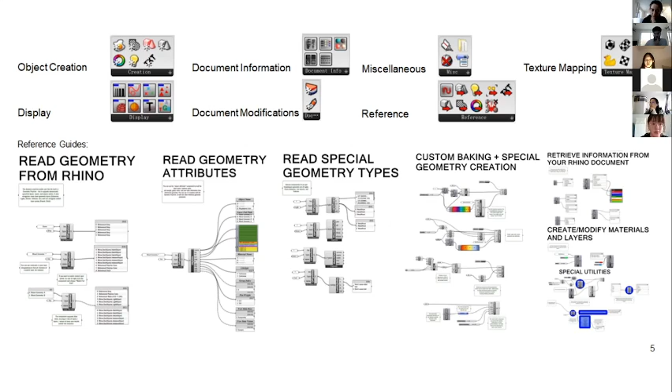I would like to introduce two plugins that can connect different design environments and enable transformation. These plugins are like bridges that enable designers to design and modify better and faster. This is the Archicad-Grasshopper Live Connection.

It is made by Graphisoft. It enables Archicad users, both Mac and Windows, to import, export, and link to Rhino models through the 3DM format without additional download, and to work seamlessly with Rhino through the connection.

With familiar nodes in Grasshopper, it's easy to create native Archicad BIM elements to automate and simplify common and complex tasks. This is a very practical interface plugin, usually designed and adjusted in Archicad or Rhino, and the real-time transformation reduces the workload and enables more possibilities. To explain the workflow, I have chosen two operations as examples.

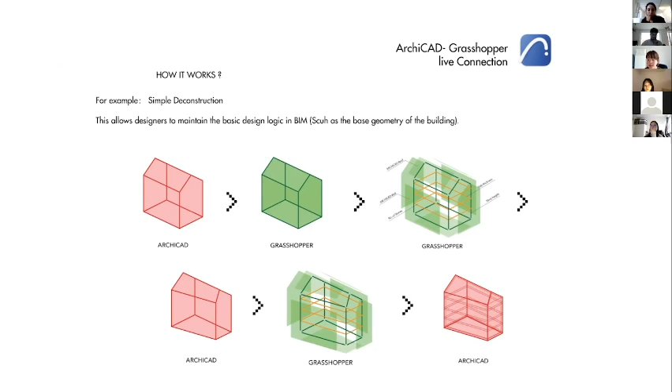One function is simple deconstruction. This allows designers to maintain the basic design logic in BIM, such as the base geometry of the building, and extend that with intelligent design details that follow changes in the core design.

As the design goes further, architects create the first mass of the building volumes in Archicad, and then later add the data of walls, roofs, slabs, windows and doors, and then add the new mass shape to the code using the 3D window of Archicad, and open Grasshopper through this deconstruction function to create the models with many details based on the conceptual mass model.

And we receive the BIM model.

If we want to do some adjustment when the geometry of the mass model was modified, the associated BIM model will update automatically, but without it, it will take a lot of time.

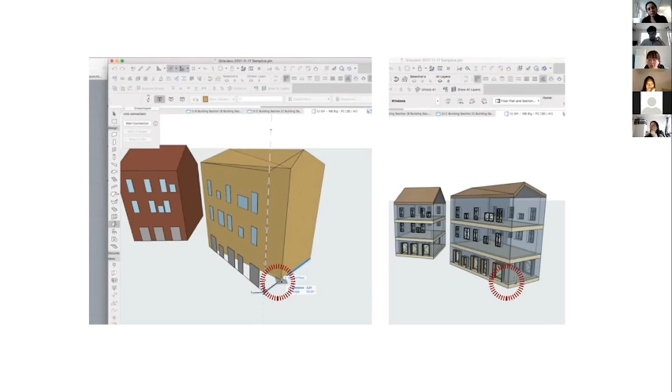Another function is to create a free-form shading device for a multi-story building. Designers may use a truly unique parametric free-form design in a professional building information modeling environment, due to the connection.

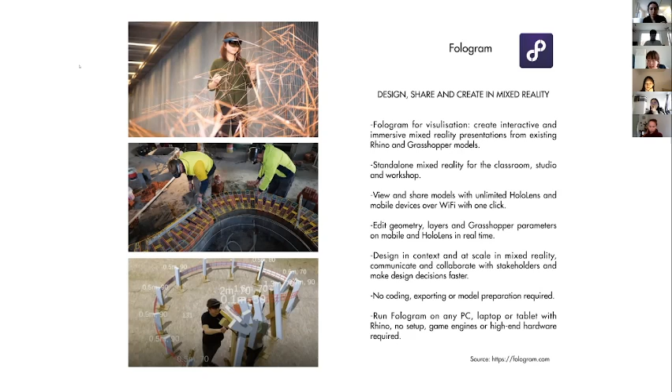People can connect Rhino and Grasshopper models to other devices such as iPad, mobile phone, and VR devices to see the holographic model mixed with reality. Users can view and share the models with HoloLens or VR glasses, and mobile devices over Wi-Fi with one click, and edit geometry layers and Grasshopper parameters on mobile and HoloLens in real time, which helps communicate with others and make design decisions faster.

Next, how it works: Fologram connects mixed reality devices to Rhino in real time, detects interactions, and builds user interfaces, so they can create mixed reality solutions in Grasshopper.

We can see the pictures: people can modify the parameters through the phone, and through the VR equipment can see the model to fix the nodes. The last pictures show the manual adjustment of the angle of the complex installations in the building process.

Currently used in installations and small buildings, it is not widely used due to the high cost and the lack of stability in manual adjustment. However, it is a very interesting and excellent way to explore and innovate for design, and it offers more possibilities for creation. Thank you.

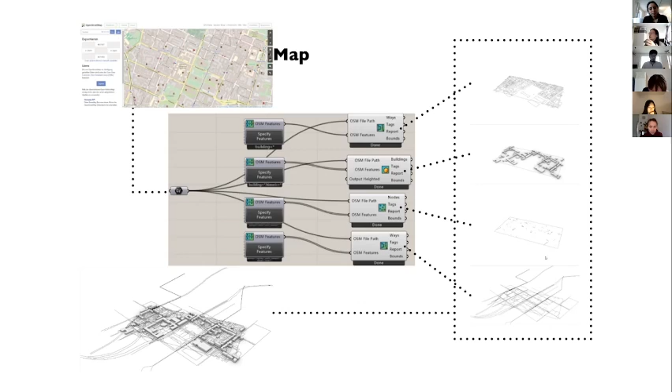For example, here is the building scrap, and here is the 3D models. If there is some height information, and here is a way. So that's all. Thank you.

Any questions, or is everyone sleeping?

Can we make a heat map with some of these plugins? If you want to make a heat map, especially from one plugin, it was difficult because a lot of plugins always have their heat maps inside their normal structure. So Ladybug, for example, has a heat map for their weather data, so you wouldn't need a specific plugin for that, actually.

Thank you. Hope that helped. One question still, a short one. The last slide with a map, extracted all the information from. Is there a specific source of map that we have to use in order to create those street networks and stuff?

So we get the data from the website OpenStreetMap, if you mean that. Okay. So which kind of...